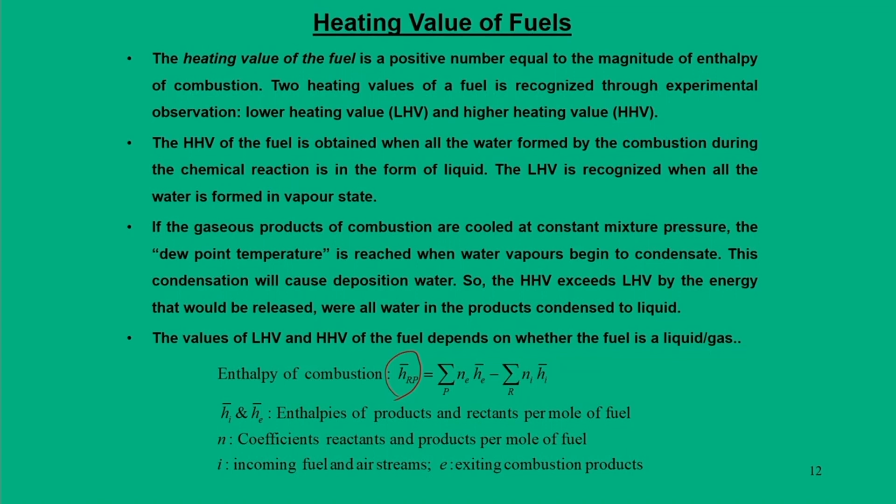When the gaseous products of combustion are cooled at constant mixture pressure, the dew point temperature is reached. When water vapor begins to condense, this causes deposition of water, and in other words, the amount by which the higher heating value exceeds the lower heating value is nothing but the difference in the energy released. So as a final note, whatever HRP we get, the enthalpy of combustion is always a negative quantity, and we assign it as a positive number as the heating value of the fuel.

Now, based on whatever we have discussed so far, we will try to solve a numerical problem. In the learning components we covered mainly enthalpy of formation, enthalpy of combustion and heating value of the fuel. So based on this we will solve a problem on a methane and air combustion system in a simple gas turbine unit.

If you look at a gas turbine unit, typically we have a compressor. That compressor is coupled with a turbine, and fuel is introduced in a combustor. The combustion products enter the turbine, and when they expand in the turbine we get power output. Air enters the compressor and fuel enters the combustor.

If you treat the entire thing as a control volume, then there are two entries, one for air and the other for fuel, and one output, the combustion products, which go out. What is given to us? The fuel is methane, CH4, and it enters at 1 atmosphere, 25 degrees centigrade. The oxidizer is air, O2 plus 3.76 N2, and it is 400% theoretical air.

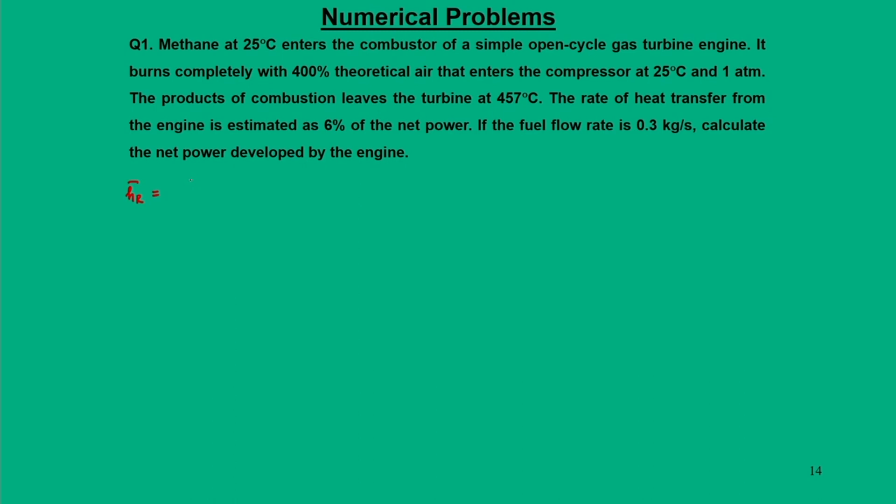Okay. So, now we are going to find out what is this HR and HP. What is HR bar? It is the molar enthalpy of reactants. Reactants consist of methane, oxygen, nitrogen. So, the enthalpy of reactants can be found out as HFO bar plus delta H bar for CH4, plus 8 times HFO bar plus delta H for oxygen, plus 30.08 times HFO bar plus delta H N2.

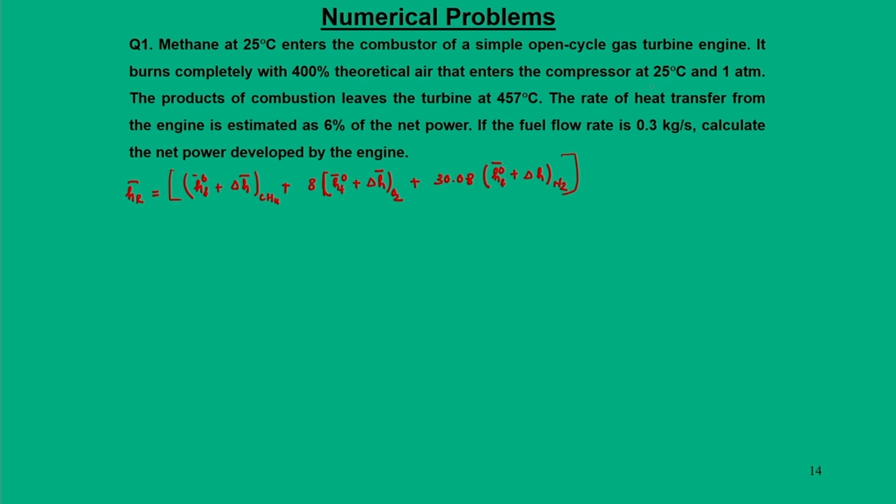So, here we can see that both reactants, methane as well as air, are at the same reference condition, 1 atmosphere and 25 degree centigrade. So, we can simply assign this delta change value to 0, and O2 and N2 are stable components, so we can assign 0 for their enthalpy of formation. So, what is left is HR bar is equal to HFO CH4 at 25 degree centigrade. The data table will give you this value as minus 74850 kilojoule per kg mole fuel.

Now, similarly for products, H bar products consist of CO2, H2O and N2. So, a similar expression we can write: HFO plus delta H bar for CO2, plus twice HFO bar plus delta H for H2O, plus 6 times HFO plus delta H bar for O2, plus 30.08 times HFO bar plus delta H bar N2.

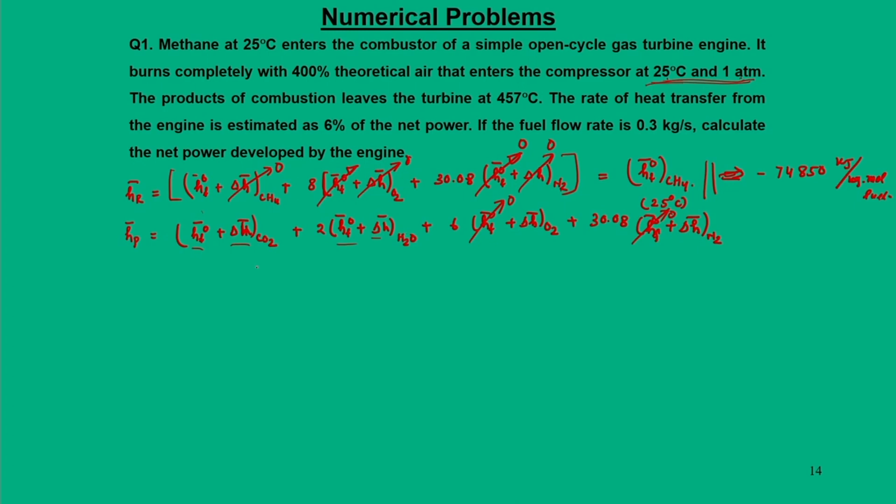Now, what are the things that we can assign to 0? Enthalpy of formation for stable components is 0, and N2 is a stable component, so this will be 0. What is left are these numbers, and you have to calculate them at 730 degree Kelvin. At 730 degree Kelvin, the data table will give you HFO CO2 is minus 393,520, all in kilojoule per kg mole.

HFO bar for CH4 is minus 74850. Then for delta H, we require delta H bar for CO2 is equal to 19258. Then delta H bar O2 is 13495. Delta H bar N2 is 12860. We do not have delta H for H2O, so delta H bar H2O is 153314. So, this is the data table.

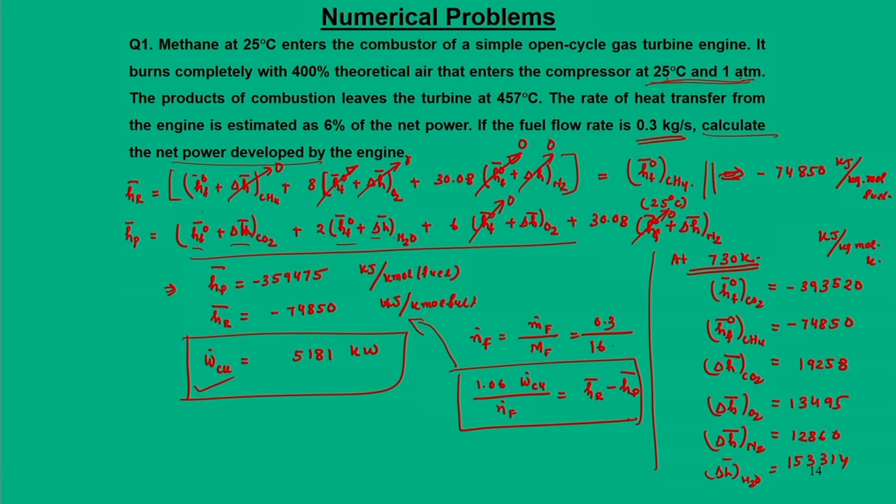So if you put this in our last equation, which we have written as 1.06 W dot Cv divided by N dot F is equal to HR bar minus HP bar, with this data we can get W dot Cv. So this is all about the problem associated with the power developed in a gas turbine combustor, which mainly uses methane as the fuel.

The next problem is about the calculation of enthalpy of combustion of gaseous methane at 1 atmosphere and 25 degree centigrade. Here we need to calculate the enthalpy of combustion for gaseous methane in two conditions: one is when liquid water is in the products, and the other is water vapor is in the products. So, question number 2. To do that, first you have to write the methane air reaction.

So methane air reaction is CH4 plus twice O2 plus 3.76 N2 will give you CO2 plus twice H2O plus 7.52 N2. And here we say that both reactants and products are at 1 atmosphere and 25 degree centigrade.

So enthalpy of combustion is defined by H bar RP, that is molar enthalpy, and in this case we can write H bar CO2 plus twice, there is 2 mole, H bar H2O, minus for reactants H bar CH4 plus twice times H bar O2, and this nitrogen will cancel because both sides we have the same number.

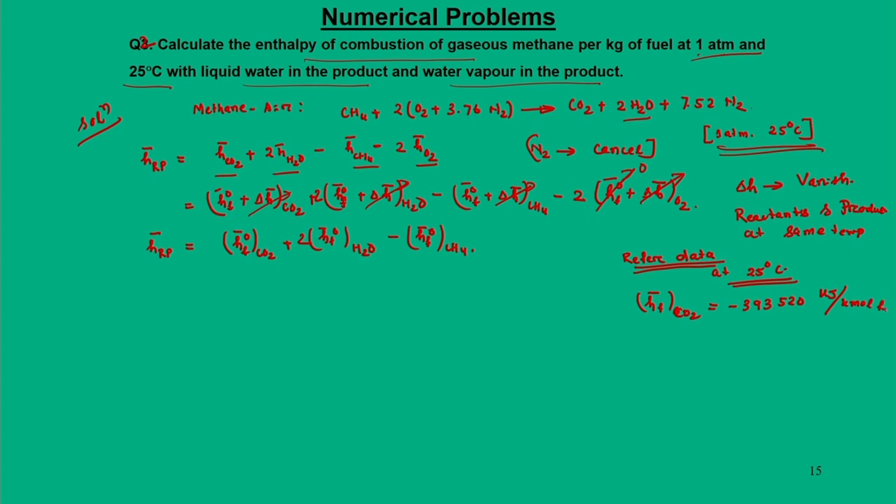Then HF bar for H2O. Here we have water in liquid form, so we have data for liquid, and HF H2O data for vapor. So we will have two numbers, minus 285,830, and the other is minus 241,820, same unit. Another number, the enthalpy of formation for methane, is minus 74,850. So we have all the numbers, we can insert them and find it out.

First part, liquid water in the products. So we can calculate this enthalpy, and the number is minus 890,330 kilojoule per kilomole fuel. Second part, water vapor, which is HRP is equal to minus 802,310 kilojoule per kilomole fuel.